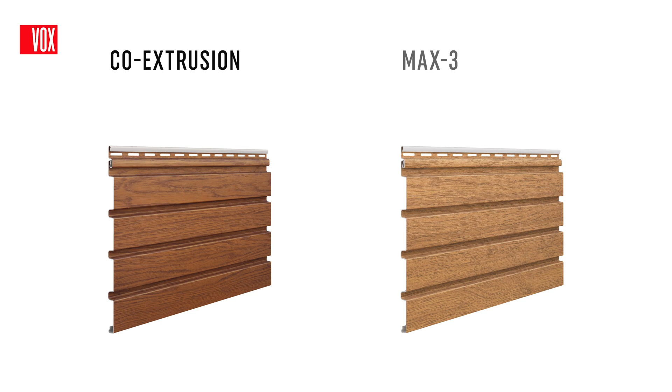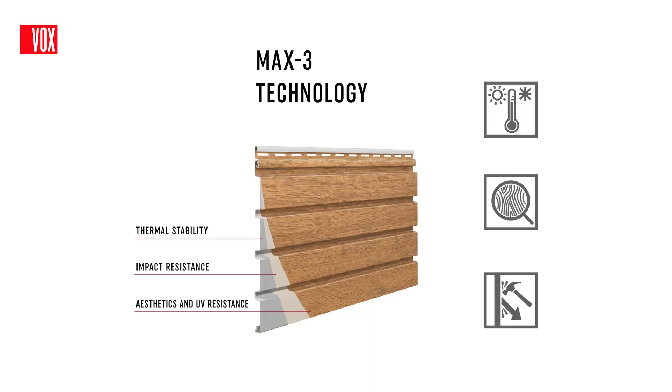The panels are available in two technologies, the well-known and popular co-extrusion technology and the innovative Max 3 technology, which creates a profile that is extremely resistant to mechanical damage and large temperature fluctuations. Fronto's wide range of options and solutions allows you to create a unique image for your home.

For a proper installation, you will need basic tools, such as a spirit level, tape measure, square, scissors, hammer, knife, pencil, drill, and power tools, such as a drill driver and chop saw. For sawing, a saw blade designed for cutting aluminium will be best. Panels can be cut with a chop saw, circular blade, or angle grinder.

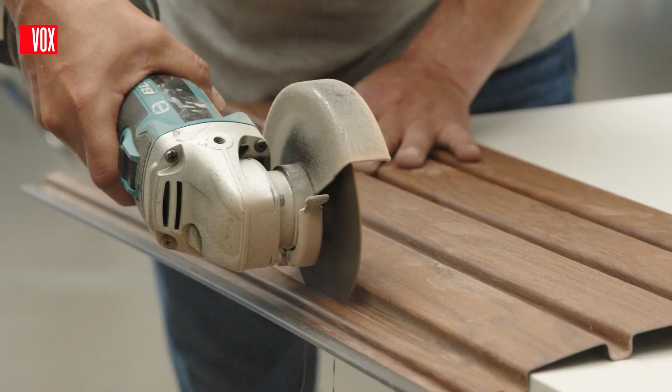Depending on the structure on which the installation will be carried out, you will need screws for wood or metal. Detailed installation instructions, available in each package and on the website, will be an indispensable aid.

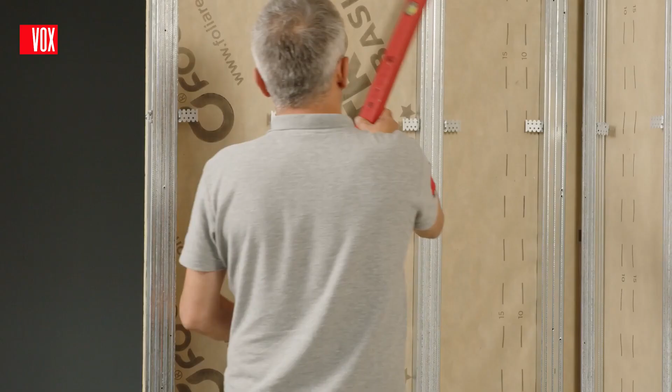The first step in facade installation is the preparation of the substructure. This is a labor-intensive operation that takes up to 70 to 80% of the total installation. However, a correctly executed substructure guarantees the correct completion of the facade and an excellent end result. The substructure also allows for adequate air circulation between the wall and the facade.

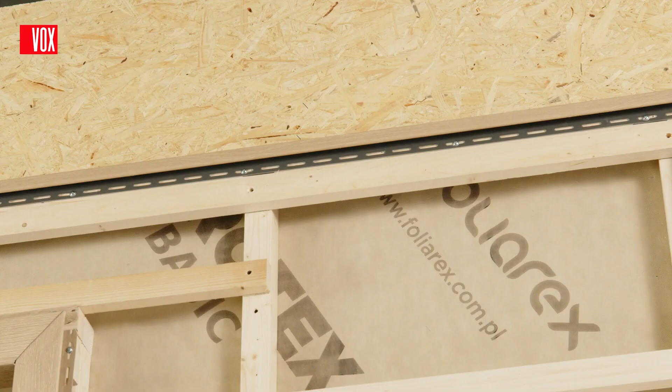For this purpose, the substructure must be installed at a height of at least 50 mm from ground level and a space of approximately 20 mm at the top edge of the wall. The same values should be maintained for the installation of finishing trims and panels. For the substructure, you can use wooden battens or metal profiles. The spacing between the battens or profiles to which the panels will be directly fixed should be a maximum of 40 cm from center to center of the batten or profile.

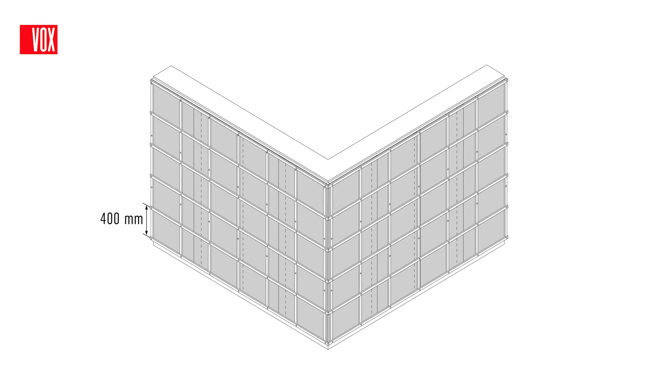To prepare a wooden frame, use wooden battens, which should be made of good quality wood, knot-free, impregnated, and with a moisture content of 15 to 17%. The battens should have dimensions of at least 30 by 22 mm. Use 35 mm screws for wood to fix the panels to the wooden substructure.

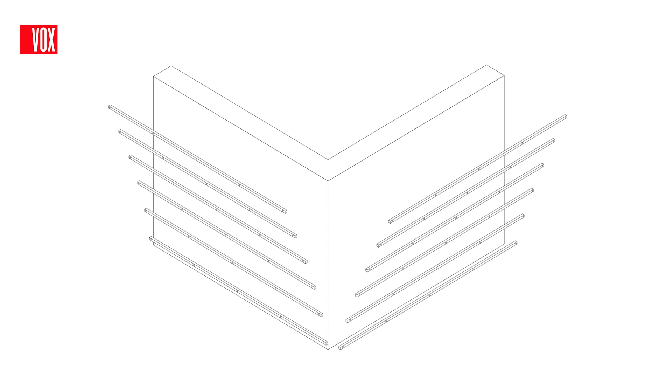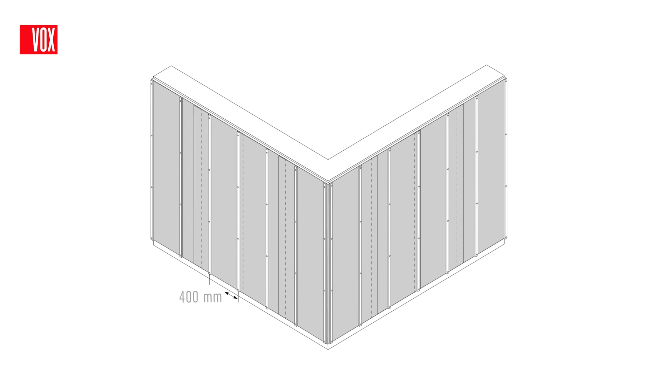First, install the horizontal battens along the length of the building, spacing them according to the type of insulation used. Then fill the space between the battens with insulating material and place the vapor-permeable membrane on top. If you plan to install the panels horizontally, the next step is to install the vertical battens, which will be the base for installing the panels and provide ventilation space between the wall and the panels. Install them at a maximum distance of 40 cm from the center to the center of the batten.

If you plan to install the panels vertically, the vertical battens installed on the insulation layer may have a spacing of more than 40 cm, as the horizontal battens will be fixed to them, which will serve as a base for the installation of the panels.

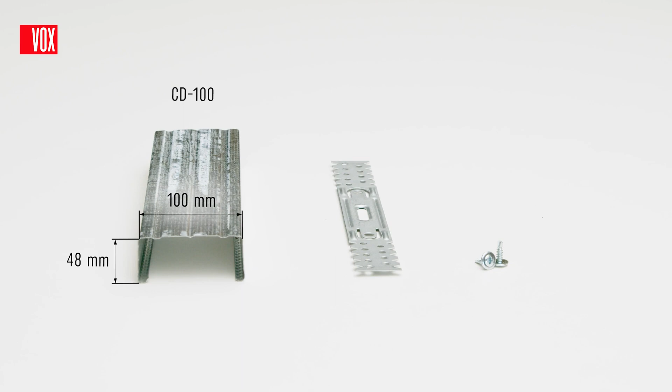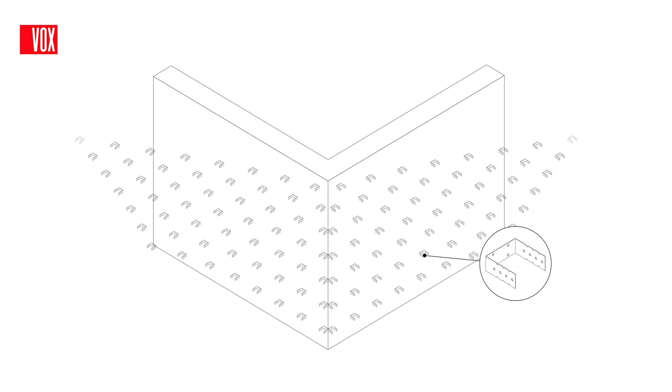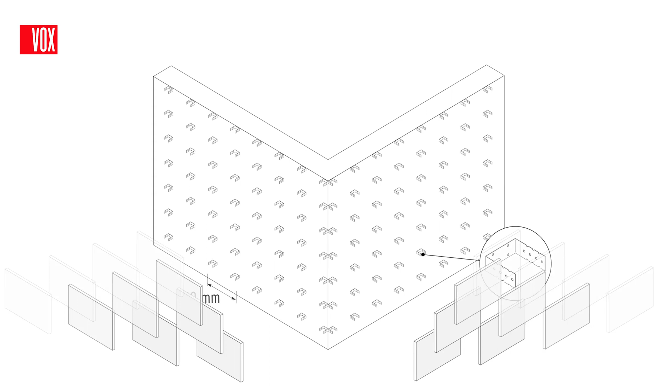To prepare a metal frame, use CD100 profiles with a height of 48 mm or CD60 profiles with a height of 27 mm. When installing horizontally, the preparation of the metal frame starts with the fastening of the fastening hooks, which enable the vertical installation of the metal profiles to the wall with a maximum distance of 40 cm from the center to the center of the profile. Next, apply thermal insulation to the attached hook and puncture it.

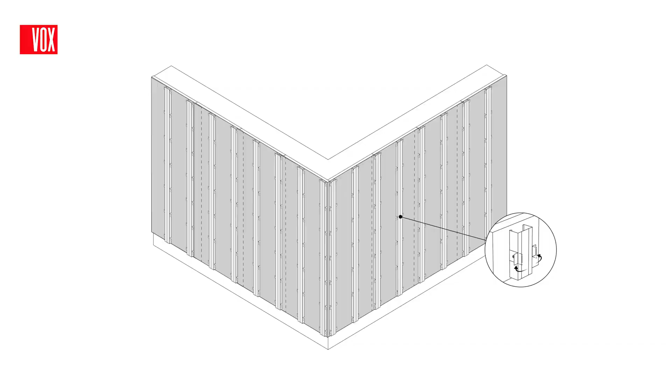A vapor barrier membrane is applied to the thermal insulation, and then metal profiles are attached to the fastening hooks, which will serve as a base for installing the Fronto panels horizontally and at the same time ensure adequate ventilation between the wall and the panels. The excess hooks are bent over, with the ends slightly hammered into the insulation, so that it adheres properly to the wall.

If you plan to install the panels vertically, a layer of profiles laid horizontally with a maximum distance of 40 cm between them must be installed on top of the vertical profiles, which in this case can be spaced more than 40 cm apart.

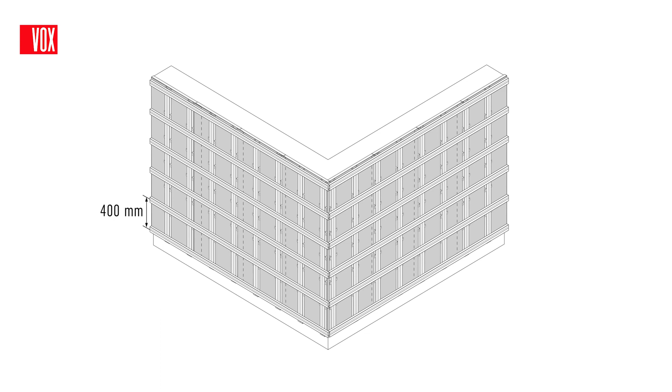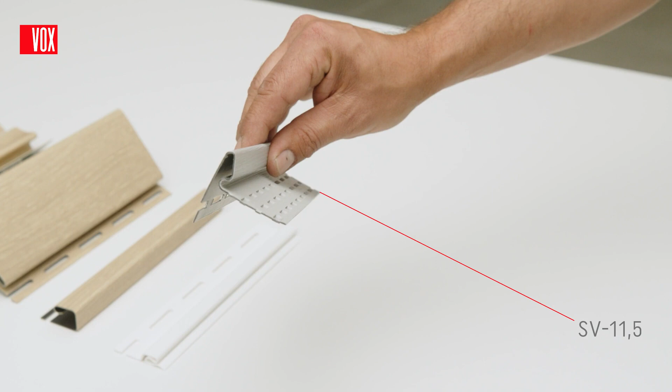The installation of the Fronto panels is made easier by a series of matching trims. First is the SV11.5 lower ventilation trim, which prevents vermin and dirt from getting under the surface of the facade, and the SV11 starting trim, which is necessary to start the installation. Next is the SV12 outer corner and the SV13 inner corner.

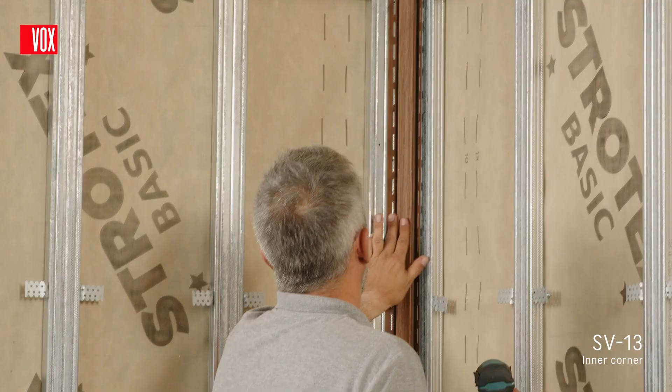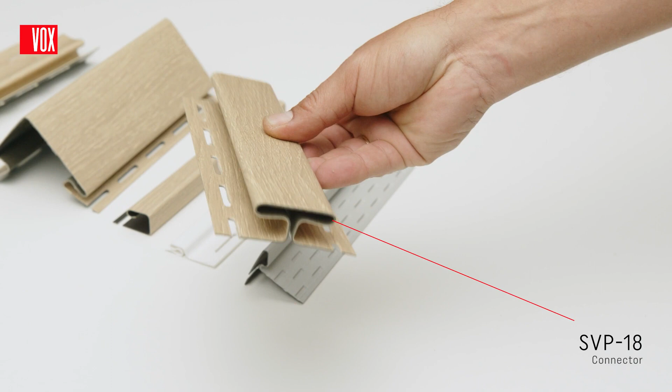The SV15J trim is very commonly used for finishing the edges at the top and side of the wall, as well as in the inner corners for vertical installation. The SVP-18 connector, on the other hand, is used for joining panels laid horizontally along their length.

The need for adequate expansion joints is related to the expansion and contraction of the panels under the influence of the ambient temperature. The expansion joints depend on the ambient conditions and are specified for each country in the installation instructions available on the website. In the absence of large daily temperature differences, an approximately 10 mm expansion gap at each end of the wall is sufficient.

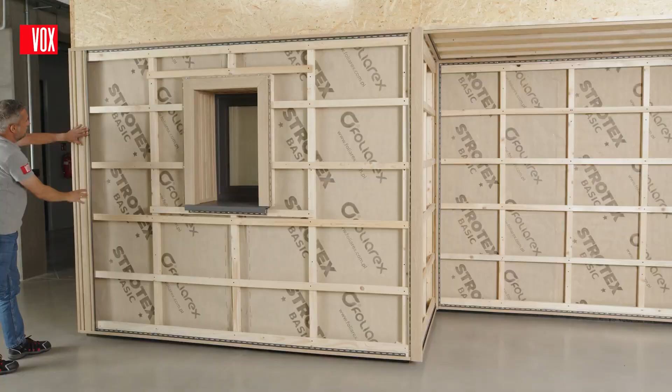A so-called fixing point is only used when the panels are installed vertically to stabilize the direction of contraction and expansion due to the ambient temperature. For the fixing point, it is best to choose the second batten from the top or the middle batten. This will prevent the panel from moving uncontrollably.

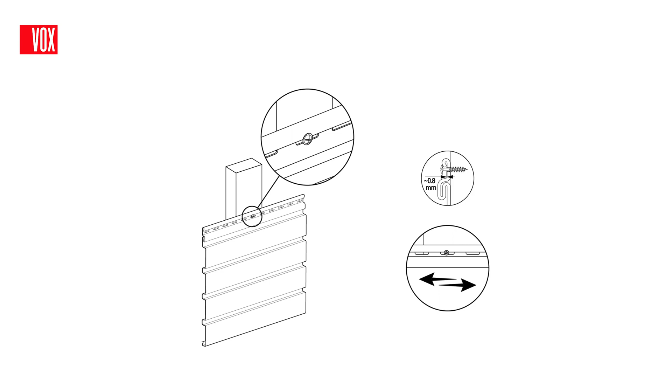Depending on how the mounting hole aligns with the batten, the following fixing methods are possible: at the edge of the mounting hole, between the mounting holes, or at the edges of the adjacent mounting holes. The panel is fixed by screwing the screws into the mounting holes. Try to keep a distance of approximately 10 mm from the side edges of the mounting hole, and do not tighten them completely, leaving a gap so the panel can move.

For vertical installation, the fronto panels are fixed to horizontal profiles, or as in our case, to wooden substructure battens. Before starting to install the panels, level and screw on the trims. The SV11 starting trim at the bottom of the wall is not used for vertical installation. This is replaced by the SV15 trim, in which several holes must be drilled for water drainage.

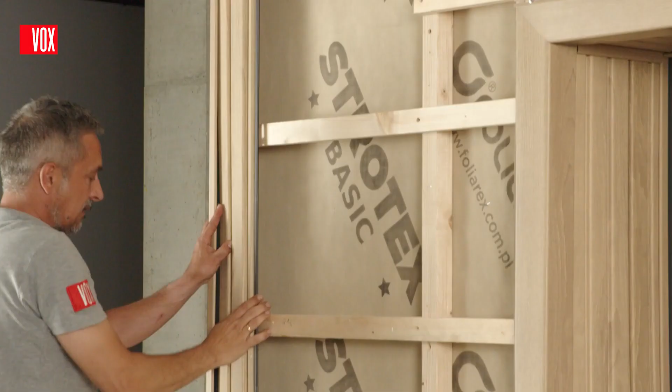The panels should be installed from left to right. Measure the required length of the panel, remembering to keep a suitable expansion joint in the trims. Cut the first panel to length and slide it into the trim. Level and then lock the panel with 2 screws on the second batten from the top.

On the other battens, fasten the screws as standard in the middle of the mounting holes and do not tighten them all the way. Each successive panel is hooked over the edge of the previous one, which makes the click lock easier, and also lock it onto the second batten from the top.

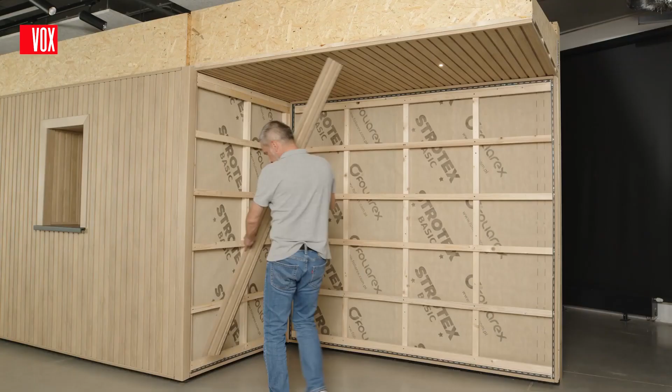The last panel also often needs trimming. In this case, it is to cut the required width. The cut lock can be used to support the cut edge. Before installing the last panel, it is advisable to make additional perforations along its final edge to act as hooks to prevent the panel from falling out of the trim.

Once the installation is complete, spray the panels with anti-static fluid and wipe down to clean the finished facade of dirt and dust.

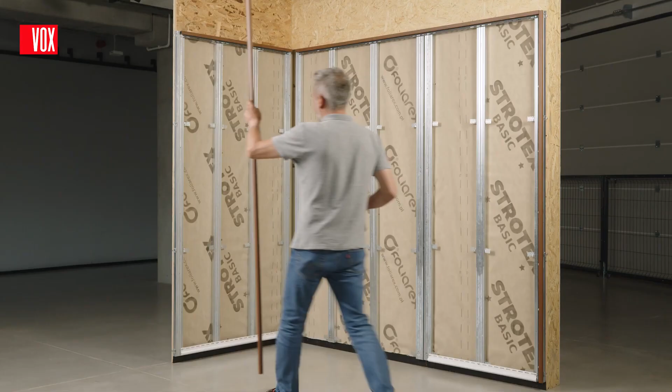For horizontal installation, the fronto panels are fixed to vertically laid battens, or in this case, to metal substructures. The actual installation of the slats starts with the leveling and fitting of the vertical trims, followed by the installation of the lower ventilation trim and the SV11 starting trim between them. All the trims must be accurately leveled using a spirit level to ensure that the panels are installed correctly.

When determining the length to which the panels must be cut, remember to maintain the correct expansion gap in the trim. The panels should be installed from the bottom up. The first panel is clipped into the starting trim and slid into the vertical trims. It is very important that the panel can move in the trims. To do this, position it more or less in the middle, for example with the same expansion gap on one side and on the other.

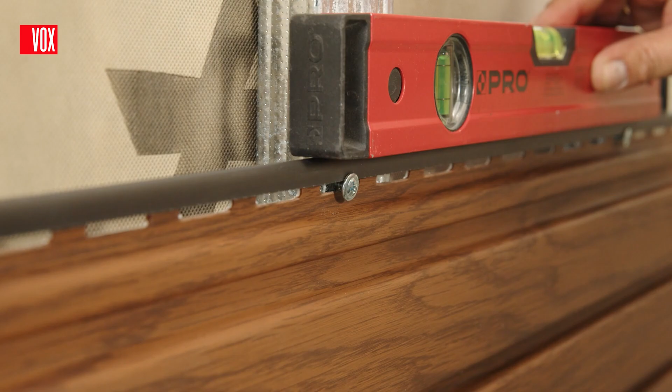Then fasten the panel with screws. Try to place the screws in the middle of the mounting hole and do not tighten them to allow the panel to move. The panel of the next layer slides into the preceding panel. The panel is correctly installed when you hear the distinctive click of the lock.

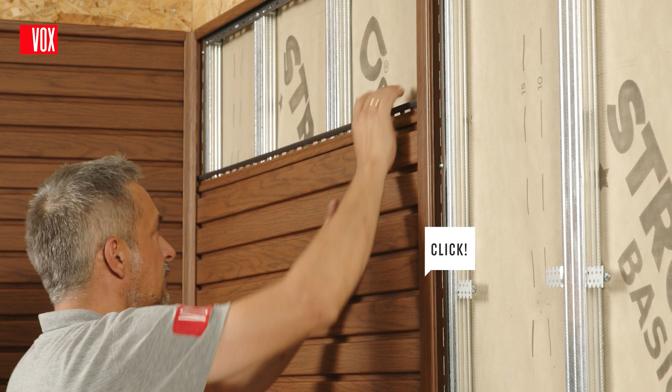Thanks to the click locks, once assembled, the panel is firmly in place and will not fall down. This allows you to reach freely for tools and install the panel without additional assistance. Each subsequent panel is installed in the same way.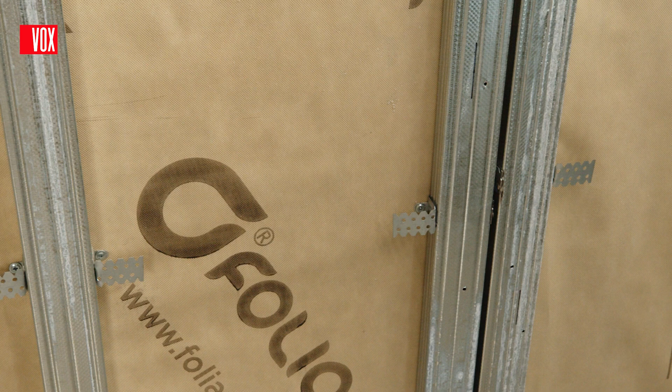The slats are joined lengthways using the SV18 connector. Joining with this connector will be necessary for wall lengths of more than 3 meters. The joint must be planned before fitting, and the connector fitted on a double or, if necessary, triple batten.

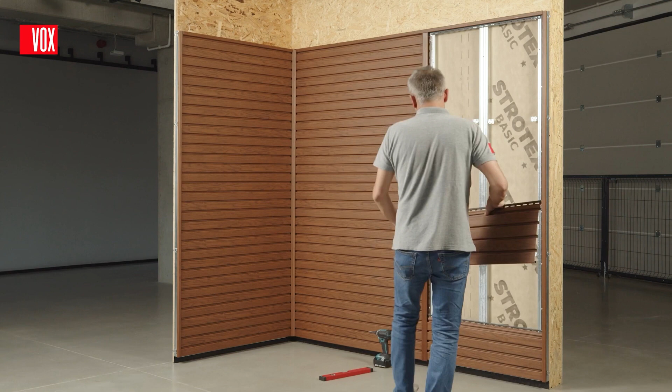The last panel often does not fit in its entirety. Therefore, you must measure the distance between the edge of the lock and the inside of the trim pocket and cut it to height accordingly. Use the cut-off lock as a support and place it in the SV15 trim.

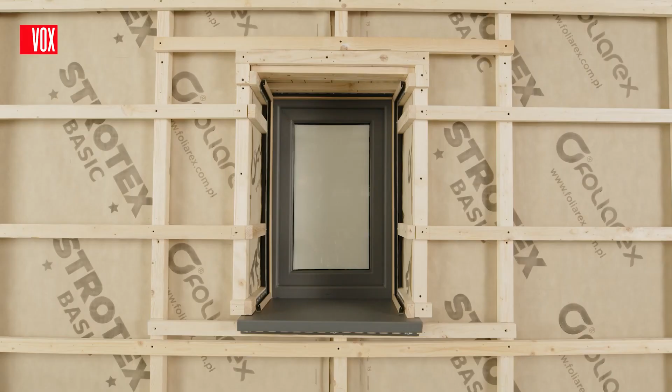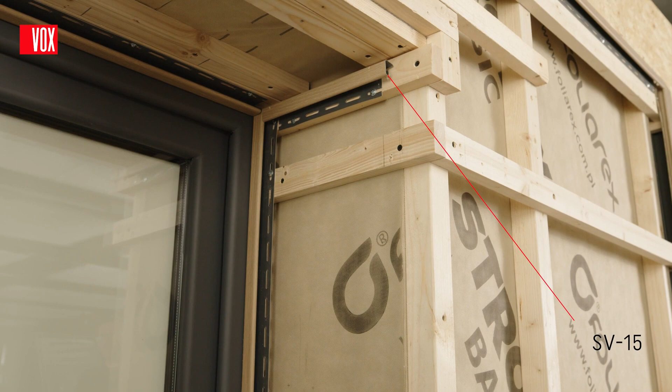For finishing window and door recesses, use an SV12 outer corner and an SV15 universal trim. At the inner and outer edges of the recess, install the battens or profiles to which the trim will be fixed. At the joint between a wall and a window, or between a wall and a door frame, install the SV15 trim on both sides and on top. Similarly, install the SV12 outer corner on the outer edge of the recess.

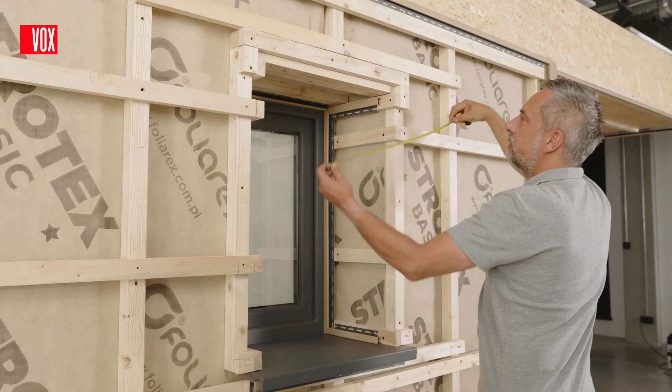The outer corner sections need to be prepared so that water can flow into the drainage channels. For this, you first need to get the dimensions. In the case of the internal dimension, 1 centimeter must be added on each side for the overlap. This is what correctly cut corners should look like. They are connected in such a way that water can drain away from the facade.

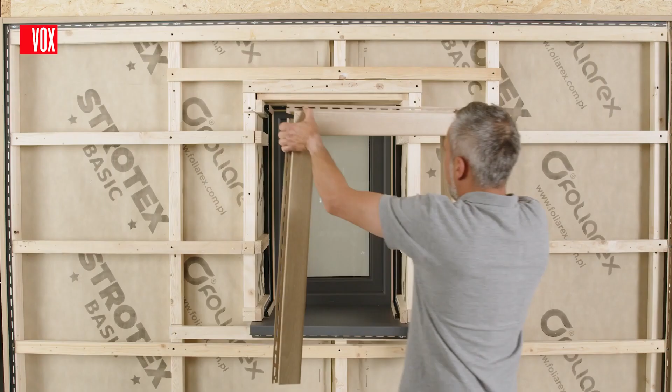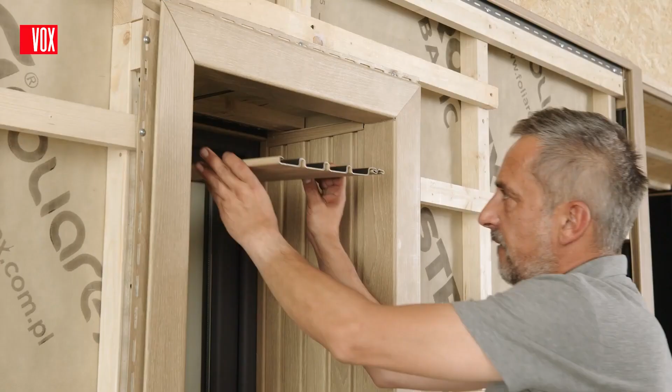The prepared trims are attached to the substructure at the outer edge of the recess. Once they have been secured, it is enough to place the panels cut to length in the pockets of the trims. When determining the length of the sections, remember the expansion joints.

Fronto slats can be installed in a recess as a soffit, provided that it is protected from direct sunlight. For this installation, a substructure with a maximum of 40 cm spacing between wooden battens or metal profiles from center to center is required. It is essential that the substructure is suitably level. Make sure that the right and left edge battens and the wall side battens are spaced away from the edge, depending on the type of installation on adjacent walls. This will enable the panels to be properly secured.

If you intend to lay the panels along the recess, then install the substructure profiles or battens as for horizontal installation. If across the recess, then install the profiles or battens as for vertical installation. Where there is a need for edge finishing, SV15 trims should be used. It is possible to install lighting in the ceiling-mounted panels, but this should be planned during the substructure preparation stage. Electrical cables must be routed to the selected locations and holes drilled in the panels.

The panels should be cut to length, with the expansion joints in the trims. Insert the first panel into the trims and screw it to the substructure so that it can move. Each subsequent panel is installed in the same way. Feed the cables for the lights through the pre-drilled holes. The last panel should be cut to the required width, inserted into the trims and clicked into the lock. Finally, install the lights in the panels.

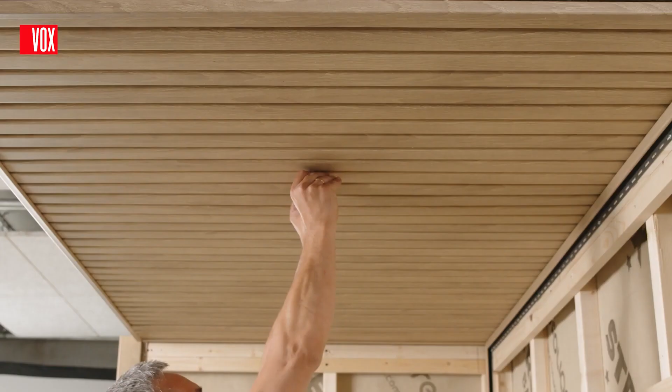After screwing the panels onto the ceiling, install the panels on the walls. In order to obtain a smooth transition from the ceiling to the wall, the panels on the wall have to be fitted in such a way that the joints meet in the same place.

Knowing how to properly join trims together makes it possible to install the facade more aesthetically and to make use of the trim sections. To join an SV15 trim, cut off approximately 5 cm of the trim section with the mounting holes and the curved edge of the trim and push the cut end into the other trim section.

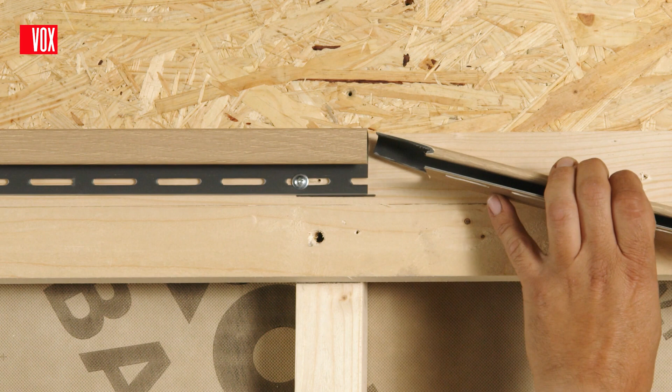For the SV12 outer corners, cut out the slotted edge and the trim pocket at the end of one section of the trim, and in the other section, cut the outer edges of the trim at an angle and then slide one trim into the other. For an aesthetically pleasing joint between the horizontal and the vertical trim, the upper edge of the horizontal trim should be cut out, bent, and inserted into the pocket of the vertical trim.

This video shows general rules and instructions for installation. It is important to read the full installation instructions on the website, as failure to do so may invalidate the warranty.